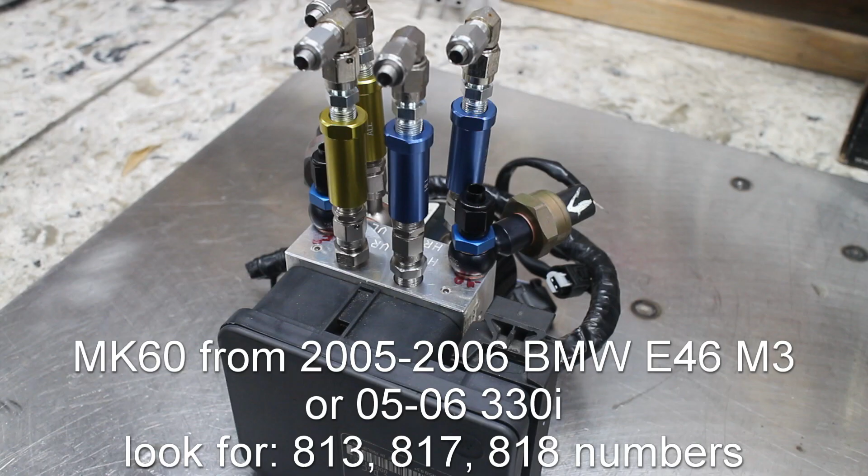I can't tell you how much I'm enjoying this ABS on my Camaro. There's zero hassle when braking and turning, and my favorite part? No flat spotting tires. These 315 Yokohama A052s have at least 3 flat spots on every tire. And every flat spot is where the tires end up cording. And it hurts to flat spot a tire this expensive. But now, that's a thing of the past.

Okay, so what is this ABS? Well, it's a Mark 60. It is the ABS unit out of a 2005 or 2006 BMW E46, my unit being the M3 unit. So why this ABS? Well, it's unique because it's completely standalone. It works with pretty much anything that has 4 wheels, and it just so happens to be an extremely good unit. The Mark 60 E1 uses internal pressure sensors and normal tone wheels.

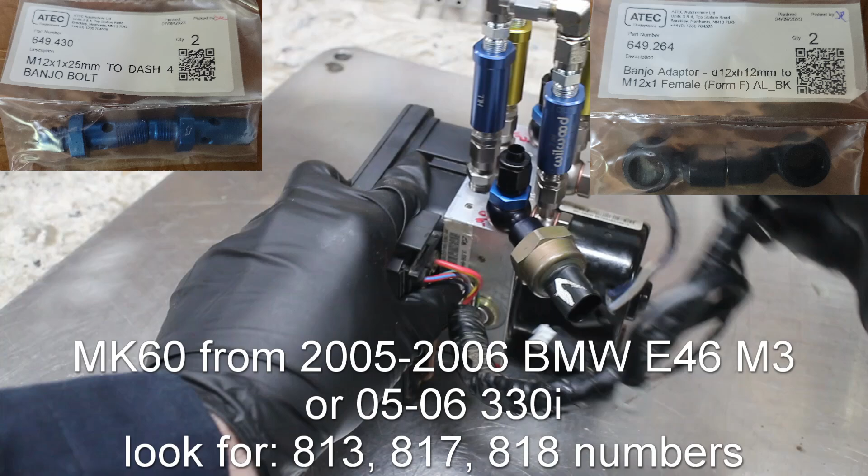The Mark 60 E5, found on E90 and E92 BMWs, uses internal pressure sensors and the newer magnetic reluctor wheels. Obviously, these use different speed sensors. So the original Mark 60 uses tone wheels and 2 external pressure sensors. There are 3 different units that you're looking for. There's an 813, 817, and an 818.

The 813 unit can be flashed with the BMW Motorsport tune. The 817 already has that race tune in it, but these units are extremely rare. The 818 is the most common, but it can't be flashed. I have the 818 unit. And just a warning, this video is extremely long. For all the racers out there, the information in here is going to be very valuable.

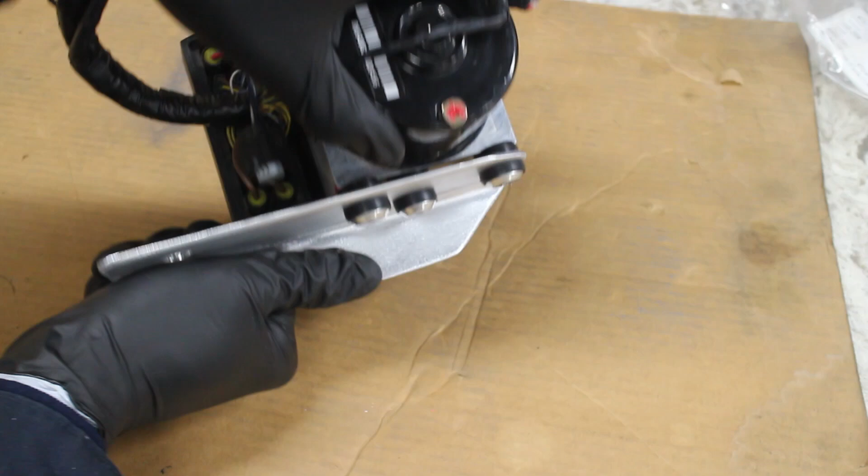Okay, so let's start this expensive boondoggle. You need to find a place to mount the unit. This is rather hard since it's not easy to find a spot to put this unit. I ended up mounting my ABS unit on rubber bumpers and to an aluminum bar, then mounted it to my cut-up crash bar. The driver front is not an ideal location for this, but I could not find any other spots.

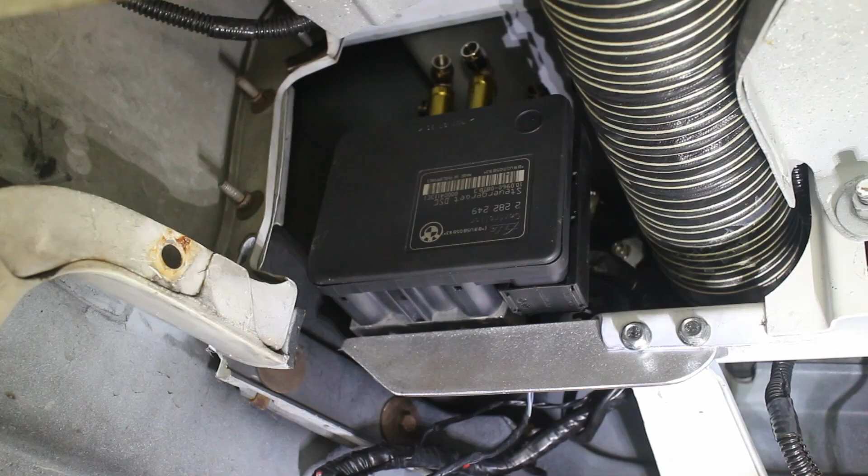If you notice, the rubber mounts allow the ABS unit to move around a little bit; this keeps vibrations from damaging the unit. Now to the wiring, the brutal part. A lot of wires, a lot of crimps. I made this wiring myself from scratch. You can buy full wiring kits for maybe less than $2,000.

This is the basic ABS wiring on a 2005 through 2006 Mark 60 ABS from an E46 M3. The red lines are terminals that you can ignore. I used a plug kit from Thule Wire Works. You can also use the factory ABS plug pin if you want to go that way. I just wanted something a little bit cleaner.

So I'll start with the 2 12-volt power wires. They use the larger crimps. I used 2 12-gauge wires for this, as they need to be able to hold 20 amps each. These crimp terminals actually work with a mixture of WeatherPack and MetriPack crimps, so I didn't have to buy any new crimps, even though these are European spec items.

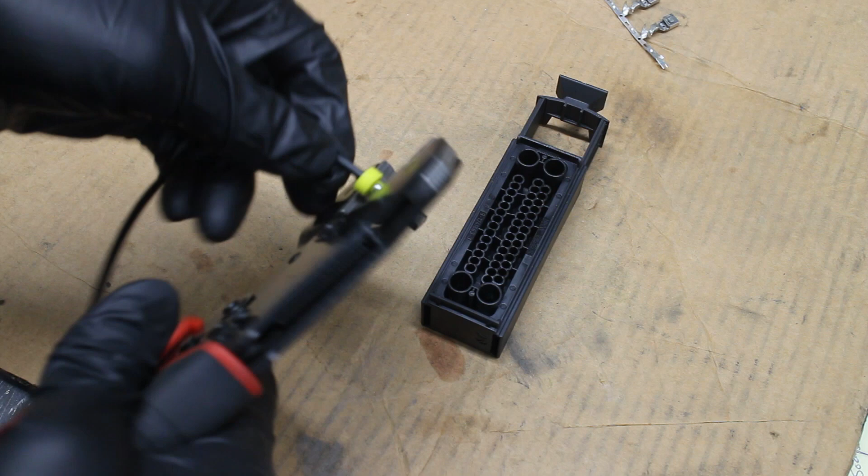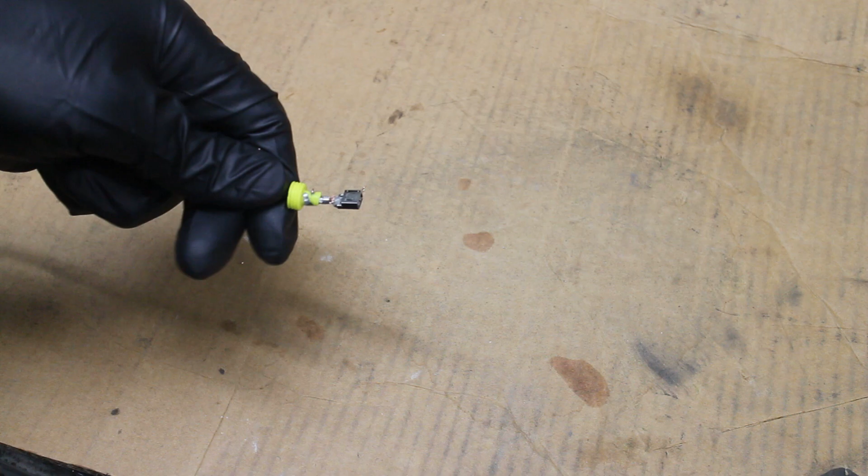The wiring chart says that the 2 12-volt power wires are pin 1 and 32. The plastic Mark 60 plug has pinhole numbers cast into it that line up with pin 1 and obviously 32. With the 2 power wires done, I then made the 2 12-gauge ground wires. Notice here, the number is cast into the plug, and that will tell you where everything goes.

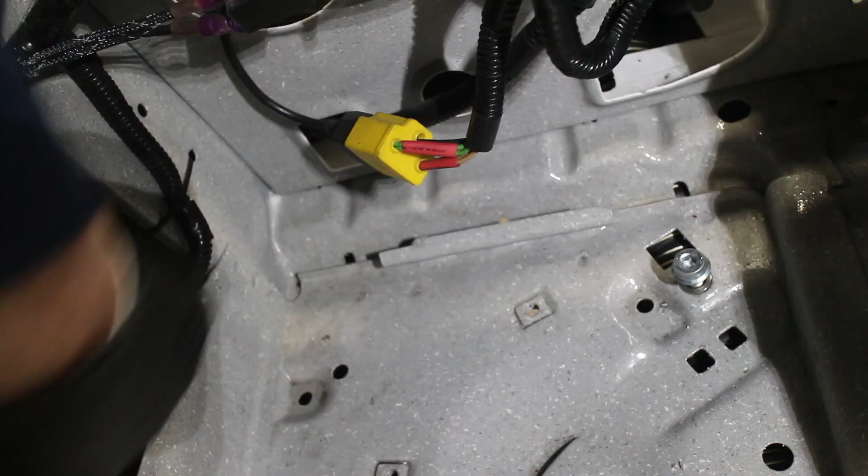And if you've ever watched any of my other wiring videos, I love to label everything, and this video is no exception. A label, some sleeving, and clear heat shrink goes on every single wire. In my case, the ground wires are very short. I mounted the 2 grounds to the crash bar since that is a chassis ground source. The 2 12-gauge power wires will go where the old C100 wires were alongside my driver inner fender.

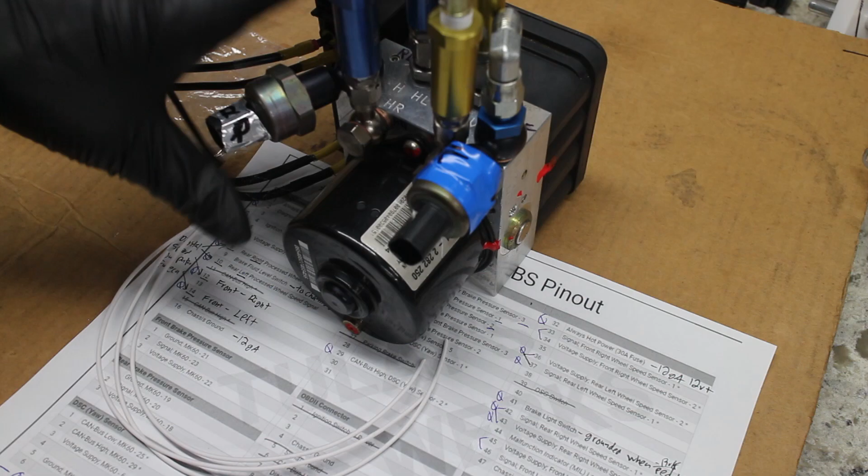So after removing the unit, I'll crimp the 2 pressure sensor wires. Terminals 18 through 20 are for the rear pressure sensor, and 21 through 23 are for the front pressure sensor. Notice the small numbers next to 18, 19, and 20. These 1, 2, and 3 terminals correspond to the sensor plug. The 1, 2, and 3 are also cast into the plastic plug so you know which one is which.

I'll count the holes, and the pressure sensor pins are right here. The rest of these pins use these tiny terminals. Normally you'd use a 20 or 22 gauge wire here. However, I had 1,000 feet of very, very expensive Waytek 18 gauge, so that's what I used.

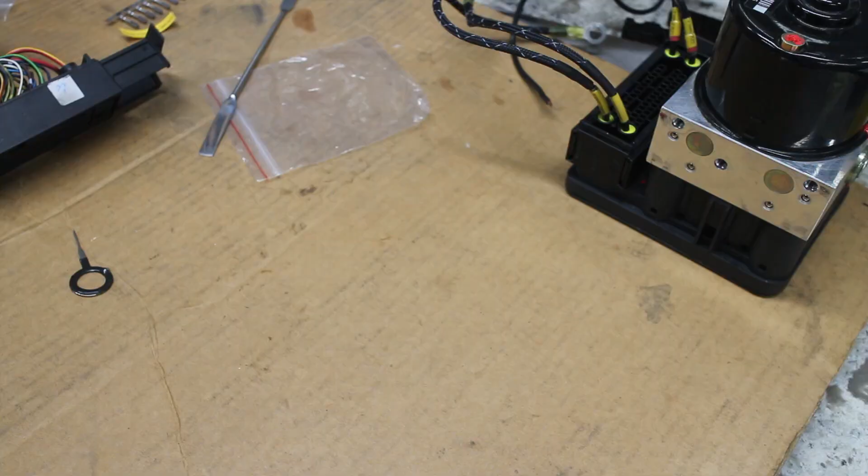The small terminals use these tiny green weather seals. I used an H6 weather pack crimp die, and that seemed to work on these European connectors. I sleeved the 3 wires loosely and did a quick length fit check. Seems to work, although I could have made them a little bit longer. The sensor plugs use a different terminal that is provided in the wiring plug kit.

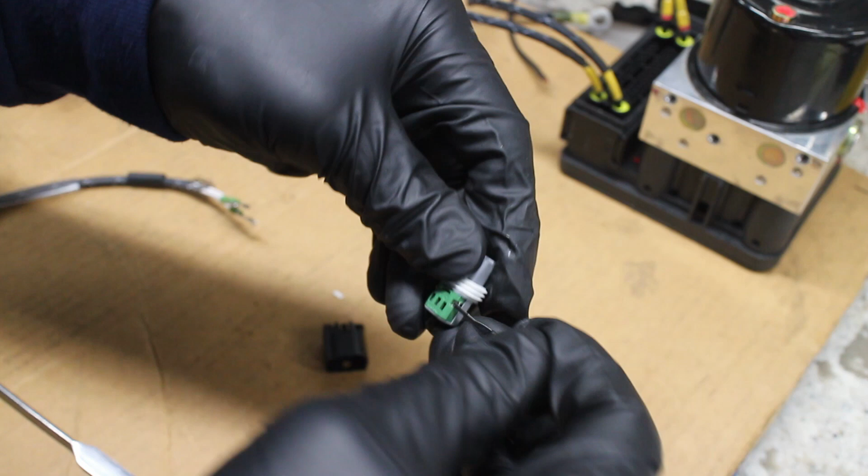And remember, the main wiring diagram shows the 1, 2, and 3 pin. These correspond to the marks on the plug. Make sure the pins are seated and locked in, then install the green plastic clip. The outer shell then slips on from behind.

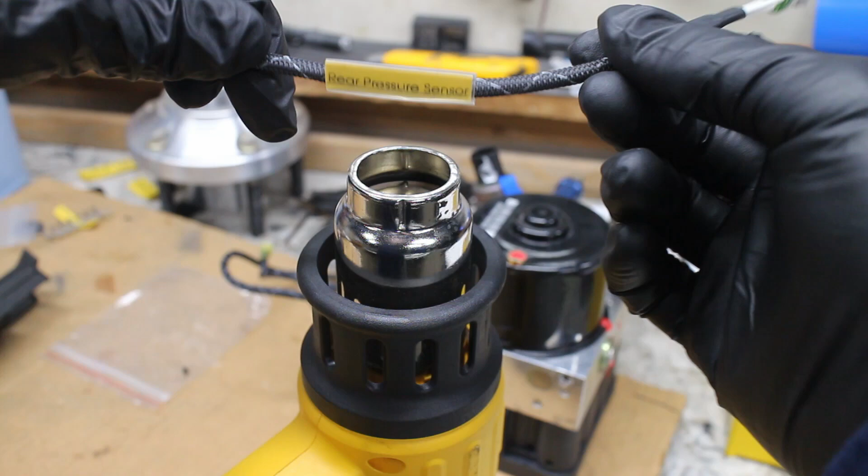Dual wall heat shrink keeps the sleeving in place, and of course all my wires are labeled. And since I'm a paranoid guy, I resistance tested every single crimp that I did on this wiring just to make sure everything was crimped correctly.

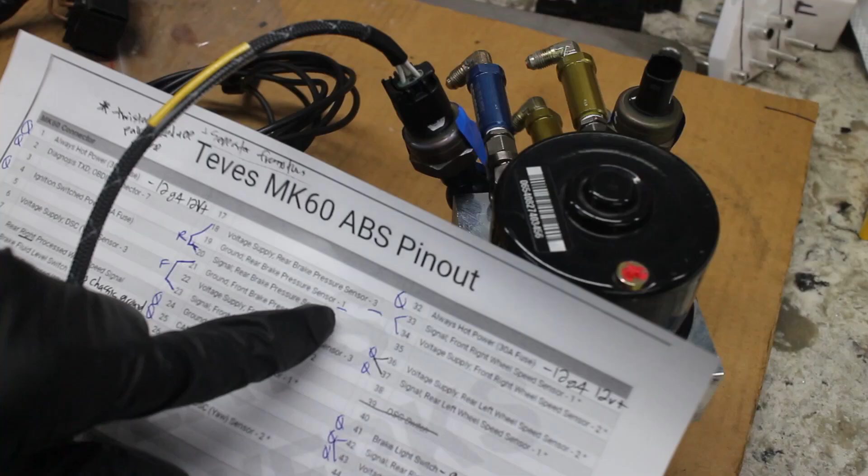The sensor plug is pushed in. I then labeled each of the 3 wires with a colored mark to tell them apart, since all my wires are white. Make sure to reference the wire chart and make sure to check where each of the 3 sensor wires go. Some pinholes are unused. These blue plug seals seal them off. I then plugged in the wires into the main plug. Repeat this process on the other pressure sensor.

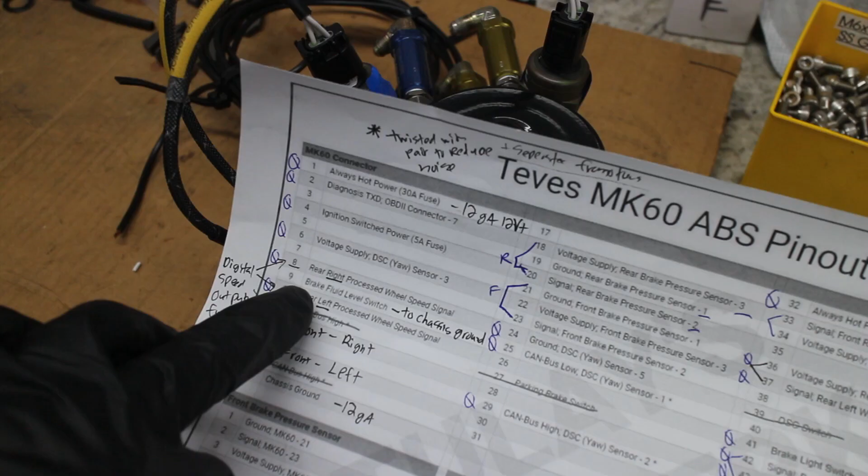Just to review, each of the 18, 19, and 20 pins corresponds with a pin on the main plug. Each pin has an asterisk that corresponds with a smaller plug. Alright, so now to pin number 9. This is for the fluid level switch. This sees ground when the sensor senses that the brake fluid reservoir is full. I don't have a fluid level sensor, so I just sent this pin to a chassis ground so the ABS unit will always think that the level is good. If you have something like a 4th gen master cylinder, you can wire up the low fluid switch to that.

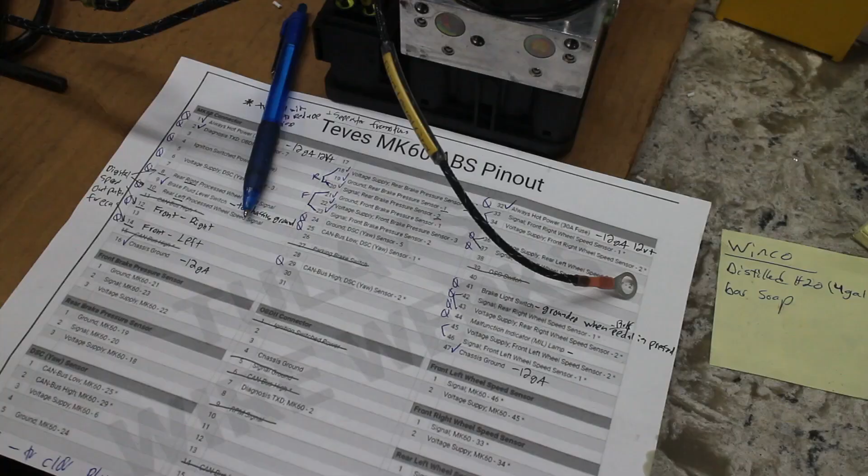Pin 2 is the number 7 OBD2 port pin wire. I already had my wire lengths set up, so I went ahead and plugged it in. Now for the yaw sensor. This tells the ABS if you're pulling G-forces, and it also needs 4 wires. Pin 25, 29, 6, and 24. Looking at pin number 6, there's a 3 after the asterisk. That means that pin 3 on the yaw sensor plug corresponds with pin 6 on the ABS unit.

I have a bad habit of wiring from the destination first. I really need to stop doing that. The other various wires get plugged in, such as the speed sensor outputs. I won't cover everything in this video, otherwise the video would be 2 hours long.

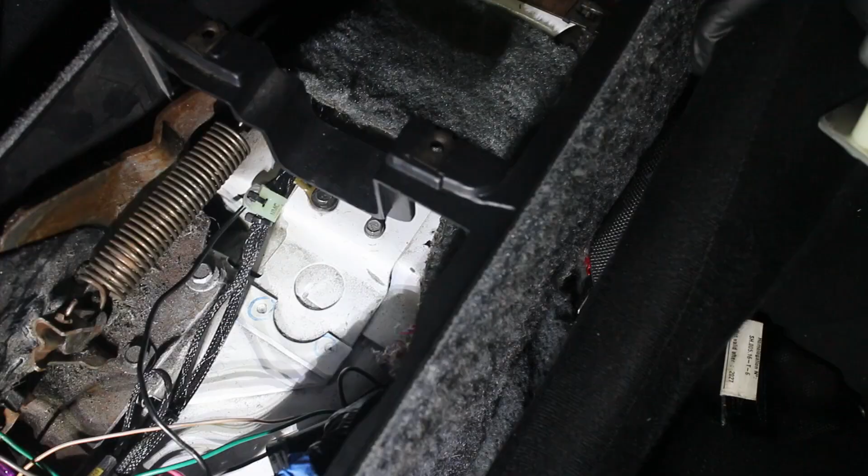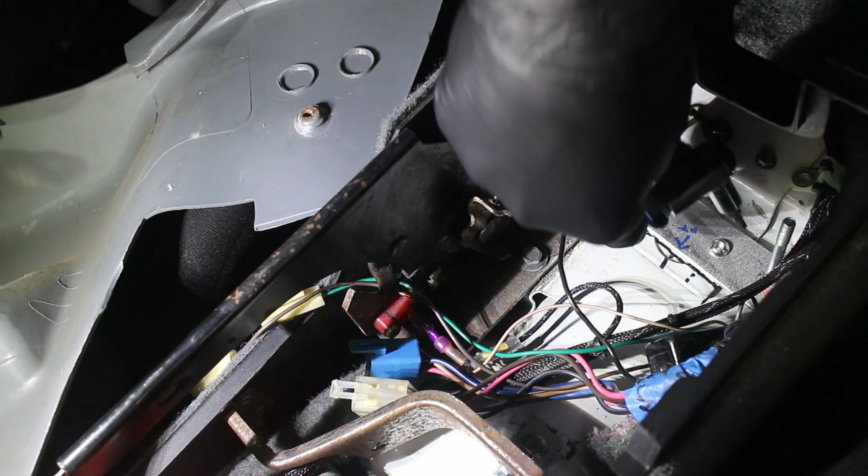So the yaw sensor needs a home, ideally close to the center line of the car, in my case, under the center console. I drilled 2 holes and installed rivnuts with RTV on them to avoid leaks. I then used this aluminum plate and a few bolts and spacers to mount the yaw sensor.

The sensor is mounted in this orientation. It looks upside down, but it's not. The tab faces up and the plug faces towards the front of the car. I made up the wires for the rest of this in various lengths.

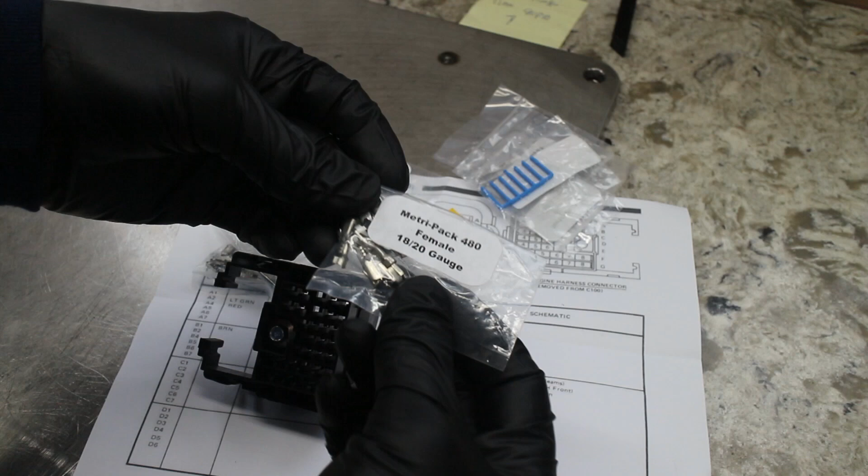My 92 Camaro has a firewall plug called the C100. It's not used on my car because I have an LS1 swap with a standalone harness. So this is the perfect place to route the wires. I bought a new C100 plug kit off eBay, then printed up a blank C100 plug diagram. The main plug is unique in this way because it installs with a slider.

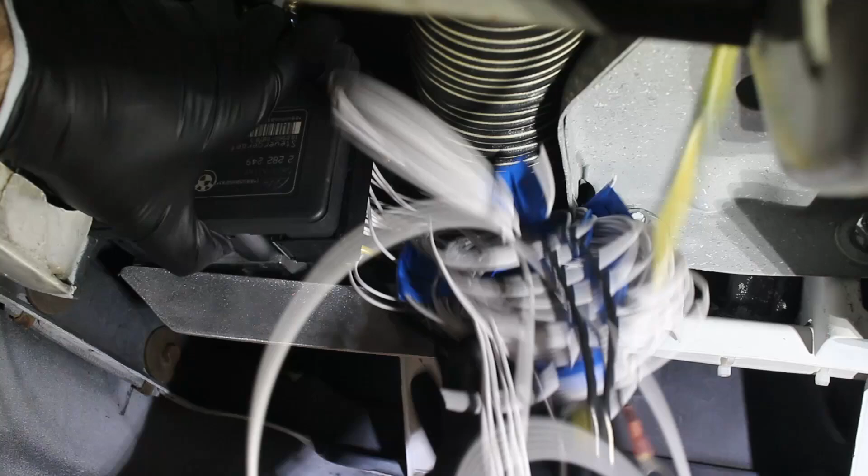These are my headlight wires. I installed big P-clamps to hold up all these wires. The unit is then bolted up. Do you remember when I said I needed to start wiring from the destination first? Well, too late now. Anyways. The wires are run through the P-clamps, then cut to length.

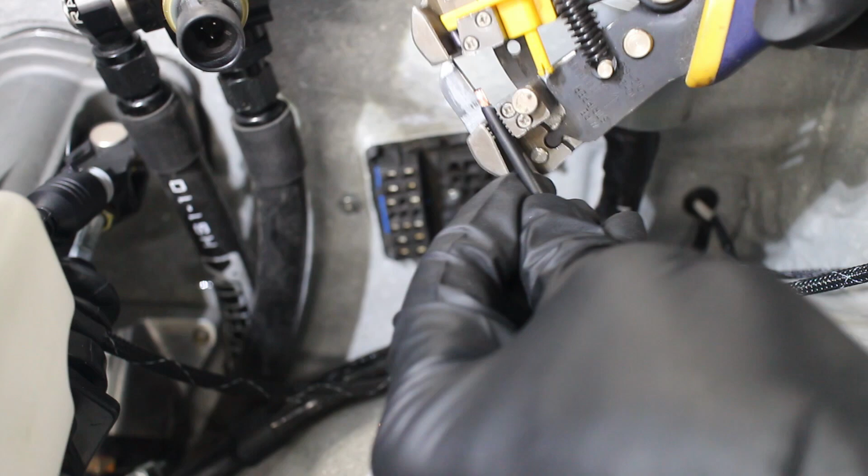Some sleeving, heat shrink, and new terminal completes the steps. And of course, a label for everything. Pin 1 and 32 are the two 12-gauge wires that are the 12-volt positive source. The C100 has several big wires from the factory, so that works with this perfectly.

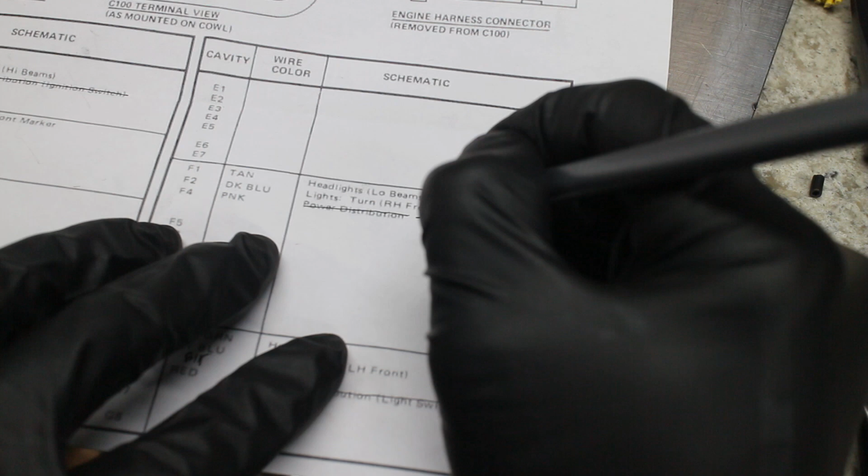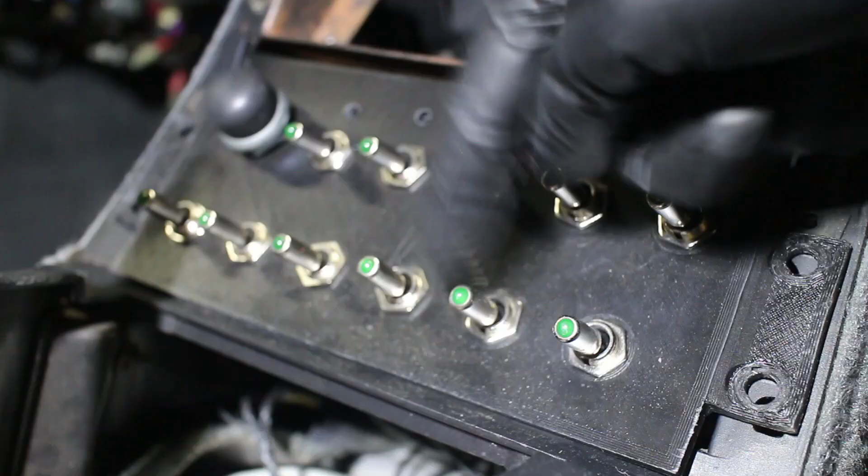I then wrote down what wire went where on this bulkhead. Yeah, I rewired my car from scratch and it got a little messy. It was my first time, but here's the disaster. Thankfully, it all works. Anyways, I already had two spare 30 amp relays already wired up to a switch. So I attached the two 12-gauge power wires to the M3 plugs and sent it to the C100 plug. And of course, wrote down every wire and where it went.

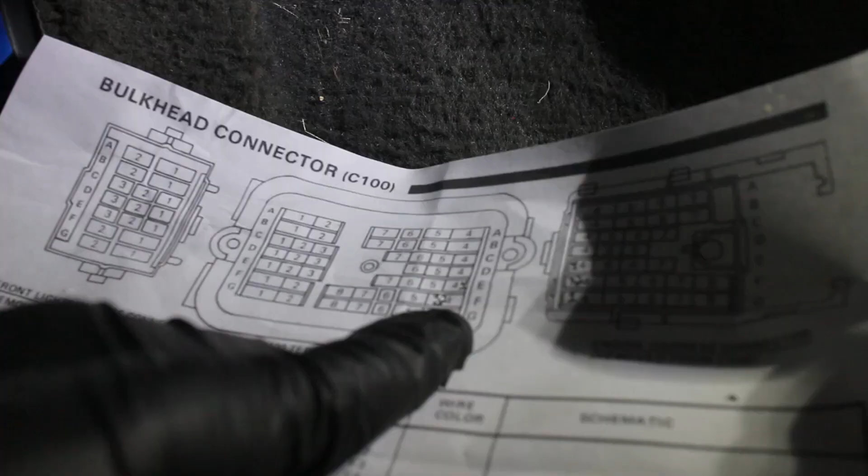So next is a 12 volt 5 amp wire for the ABS activation. This is typically powered on when the car is running. If you want to turn the ABS unit on and off, if you put a toggle switch on this wire, that'll get you what you want. But in my case, my car is powered off of a single switch. I simply attach this wire to a 12 volt source.

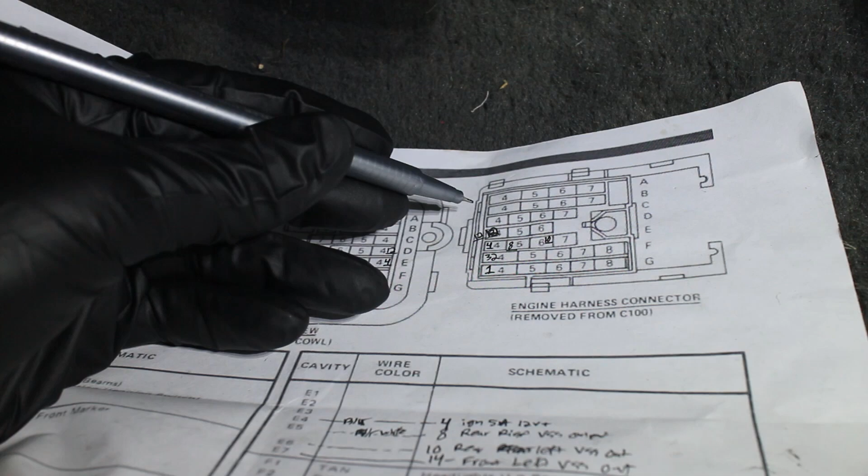Pin 8, 10, 12, and 14 are processed speed outputs, meaning in the future, I can attach an ECU that uses traction control or the like, and I can use the ABS wheel speed sensors as the data. I attach these wires to a Deutsch plug for future projects. Hint, hint. I then pinned it into the C100 on the front and back.

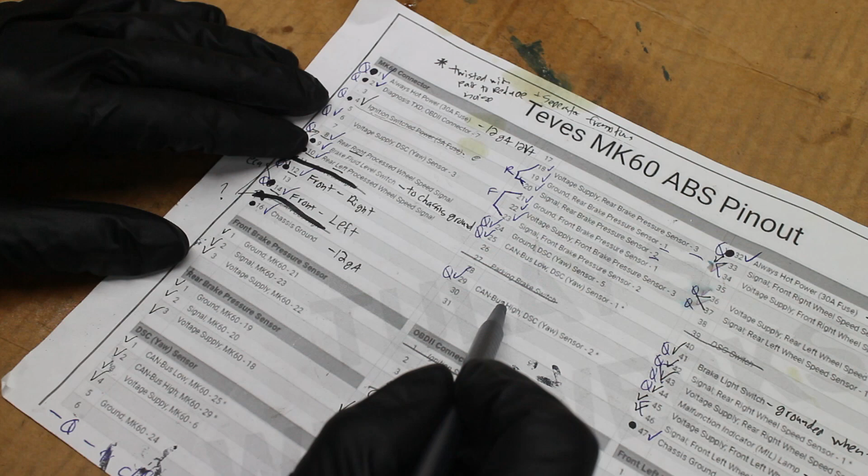I purchased an OBD2 pin kit for like $10. The MK60 pin 2 goes to the pin 7 on the OBD2 port. So now on to the yaw sensor wiring. Pin 25, 29, 6, and 24 correspond with pins 1 through 4 on the yaw plug. The yaw plug is assembled and disassembled just like the pressure sensor plugs on the ABS unit.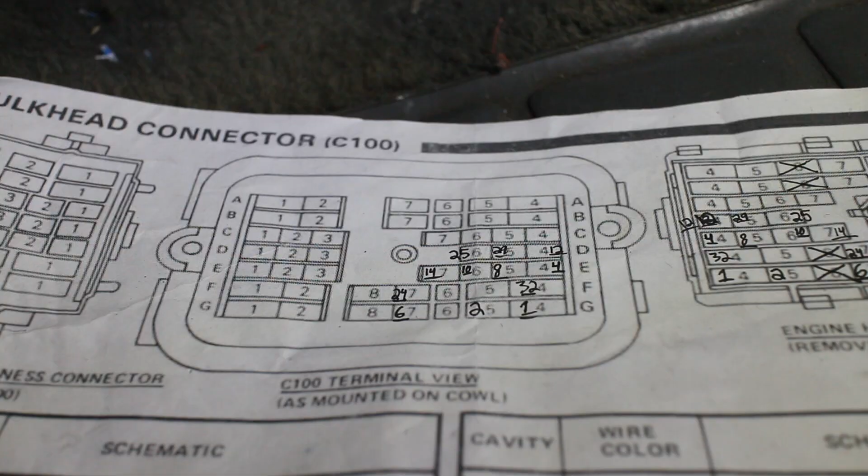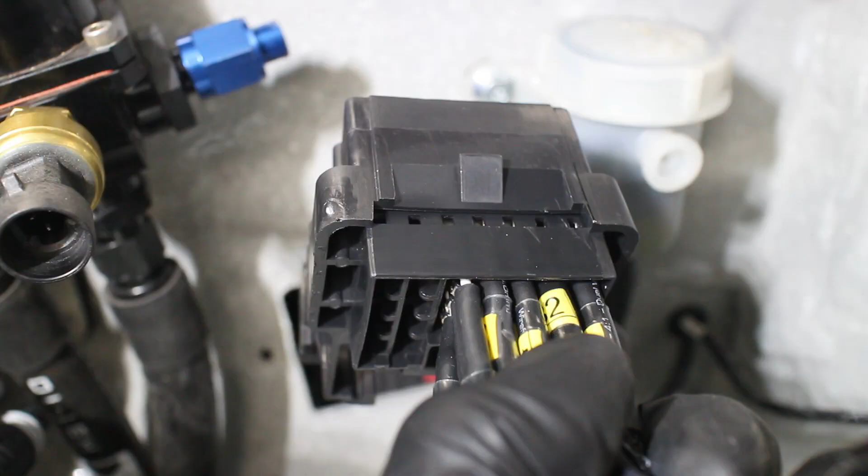The yaw sensor wires are then installed on my firewall plug. The majority of the C100 bulkhead uses a common MetriPack 280. And again, label and record where everything goes. The yaw sensor is plugged in and the C100 pins installed. The rest of the rear speed sensors and brake pedal wires are plugged into the C100. This plastic retaining clip keeps all the pins in.

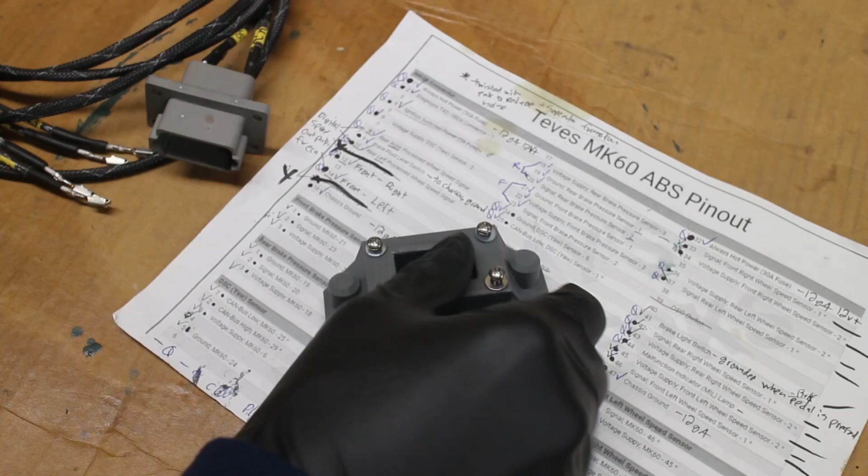So now for the rear speed sensors. I need a way to route them out of the car and to the axles. So I 3D printed a bulkhead for a Deutsch 12-pin flanged plug. I cut a hole in the rear for the bulkhead and then installed it just like my fuel pump bulkhead,

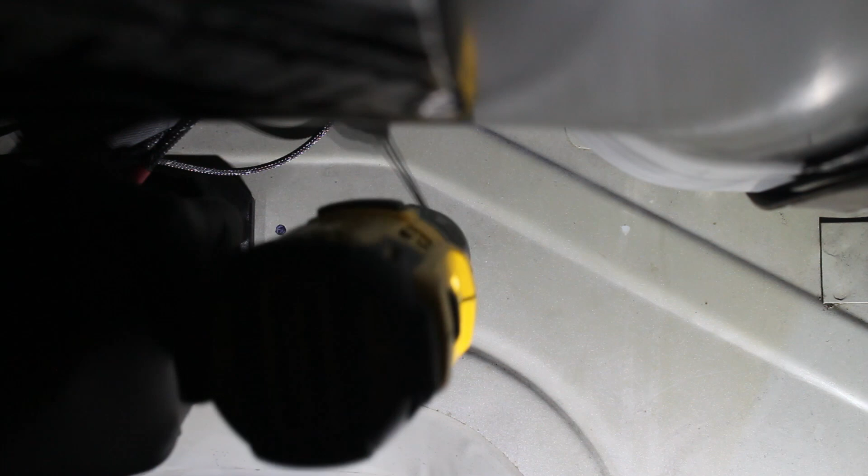It's a pretty easy install overall. The wires are fed through and the flange plug is screwed in.

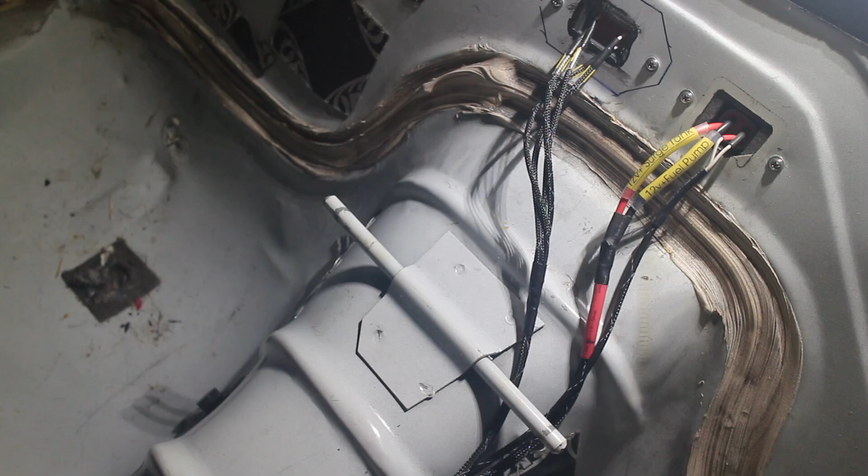I peeled back the carpet and ran the 4 rear speed sensor wires underneath of it. I routed the wires through the center console and all the way to the C100 plug.

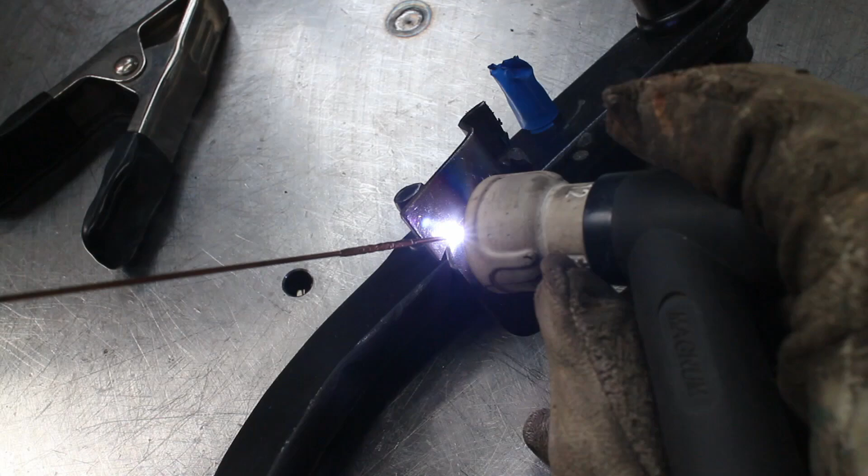So I ground this part off of the brake pedal switch pad a little while back. And surprise, surprise, I need to put the metal back. A few welds and a grinder, and it's all good again. This is for the ABS brake pedal switch. Pin 41 should be grounded when the brake pedal is pressed, and it should be an open circuit when the brake pedal is not pressed.

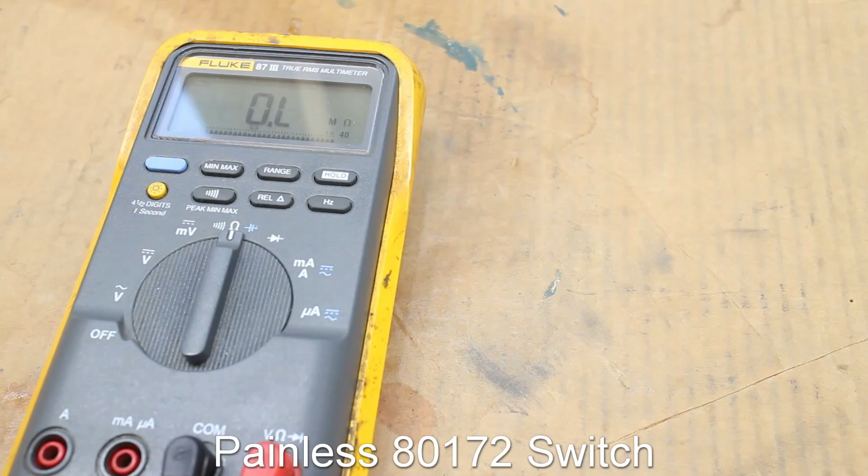I ended up using this Painless brake switch. When the switch is pressed, it's an open circuit. When the switch is unpressed, the circuit is connected. So I had a spot open where my cruise control switch used to be, so the Painless switch then takes its place. The OEM switch uses these weird clips, but this switch uses a nut instead.

To make this work, one pin on the switch is connected to a chassis ground. In my case, this rather crowded ground screw.

So pin 41 is grounded when the brake pedal is pressed. Now onto pin 44, the warning light for any ABS issues.

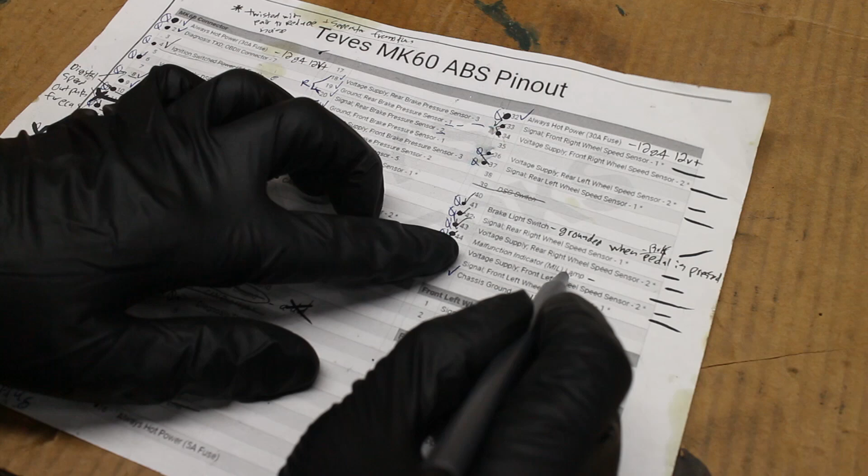I ordered this PCB from a guy online named Alex. This board simplified the ABS warning light since the Germans wired it up like weirdos. So it has 5 pins to solder: the ABS pin, which is pin 44, a chassis ground, 12-volt switched power, LED 12-volt power, and the LED ground.

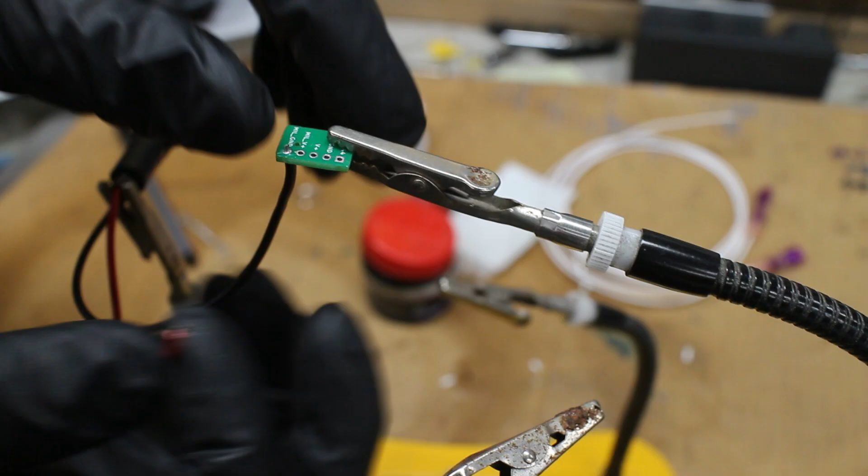I started by soldering this ABS LED that I got off Amazon. Some solder flux and the wires solder up very easily. Then the next 3 wires are soldered in. The 18 gauge wire that I'm using is a little bit too big, so I had to thin it down a bit to fit the PCB. Not a big deal.

This is the ABS LED part number. The light uses a 1/2 inch hole and it's a pretty good solution for this. The C100 plug is pinned up and bolted back in. The main ABS plug has this plastic pin as well.

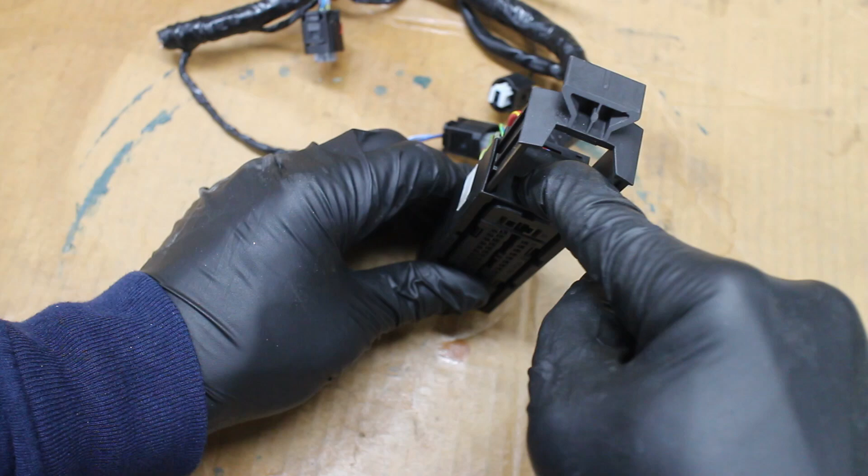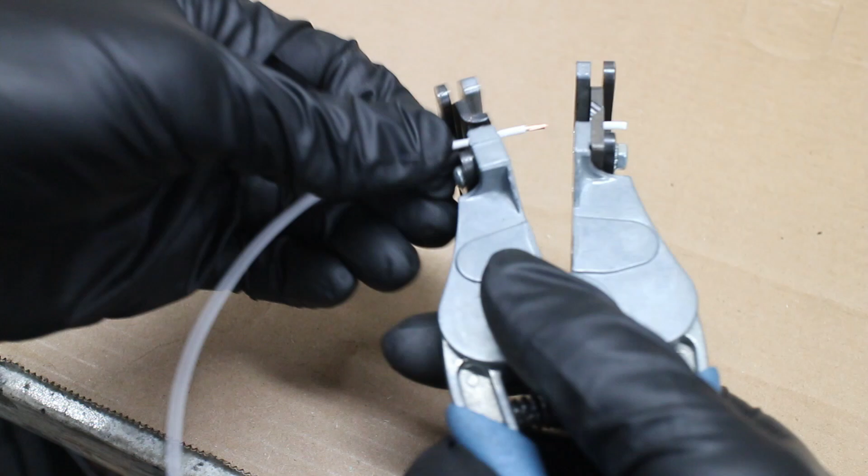And now for the speed sensor plugs. They're crimped the same way as the other sensors. Push the plugs in. The plugs have numbers 1 and 2 molded into the plastic. These correspond with the ABS pins on the wire chart. Then this plastic piece clips on. The rear wires attach to my 12-pin flange plug in the rear of the car.

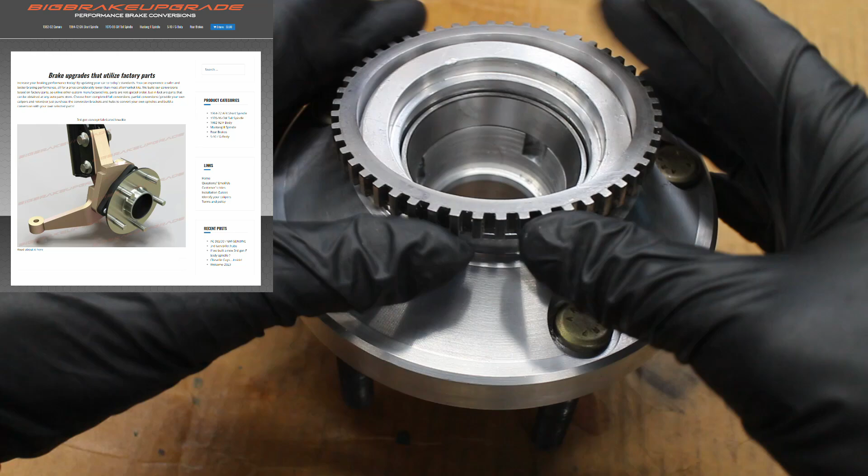Now for the big items, the ABS tone wheels. My 92 Camaro never had any, so I'm going to have to install 4 of them, and that's where the difficult part comes in. I used tone wheels from a 2014 Mustang, then had them machined to fit. These are 50-tooth tone wheels. The ABS unit doesn't really care about the tooth count as long as all 4 of the tone rings have the same tooth count. My billet hubs were machined to accept this ABS tone wheel.

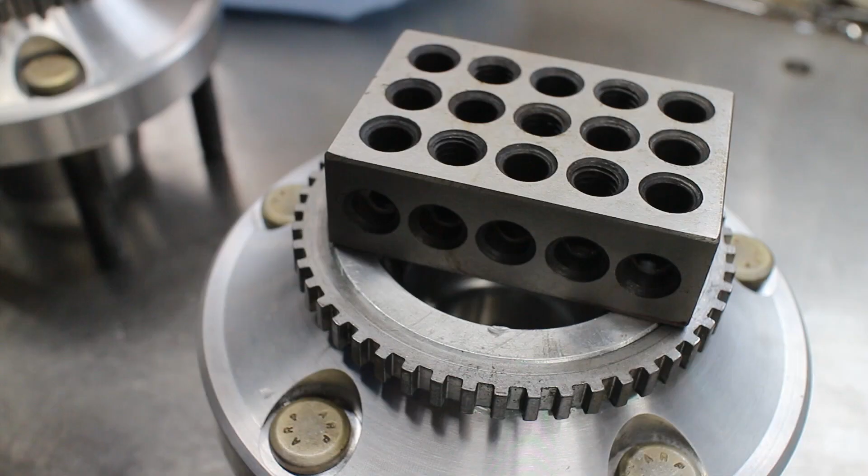Thanks to Scott at BigBrakeUpgrade.com for doing this for me, for a mild fee. I used about a 3/1000th of an inch press fit. I froze my hubs in my freezer and then cooked my ABS rings in an oven. Green Loctite is applied and the ring is hammered on, nice and flat.

My 3rd gen axles have no area for an ABS tone ring, so I ordered a custom set of 98 through 2002 Camaro axles from Moser, then had Moser cut them down to the shorter 3rd gen length. I had the Mustang tone wheels machined to accept a 0.002 of an inch interference fit. I don't have any shots of this, but a local axle shop pressed the rings on for me since I don't have any way to do it myself.

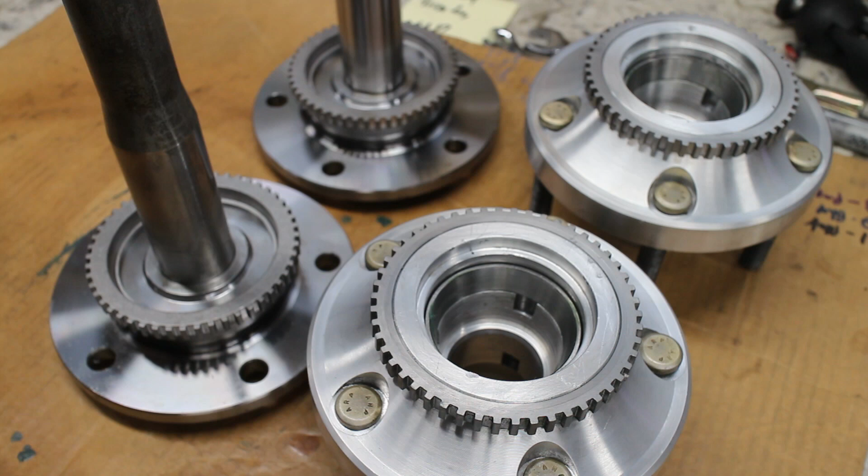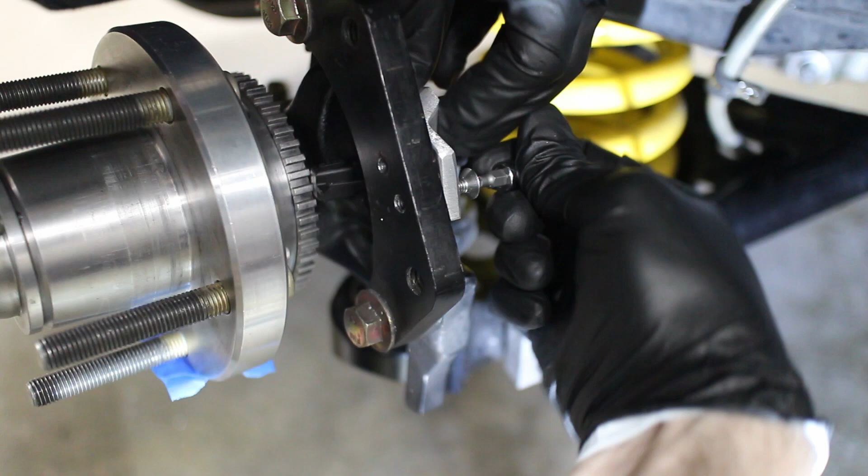Now the speed sensors. I used the rear Bosch E46 speed sensors on all 4 corners. Which speed sensor you choose is going to depend on what car and how much room you have. I ended up using this wacky aluminum mount attached to my brake caliper backing plate to mount the speed sensor. There are more than just E46 speed sensors that work with this MK60 ABS unit, but I'm not going to cover all that. That information is available online.

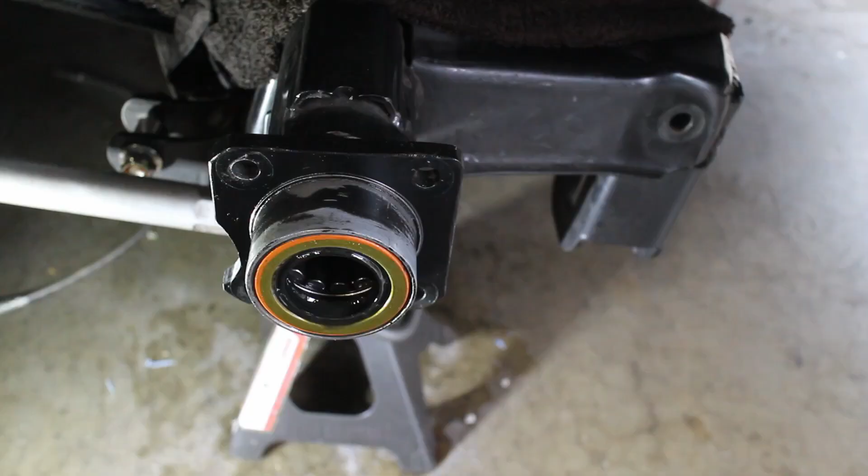I set the speed sensor gap to about 20 thousandths. That's about 0.5 millimeter. Less gap is generally better. What I ended up doing was drilling holes in my backing plates and then shoved the sensor in. This barely clears the drum parking brake shoes, but it did work. Also used the same 20 thousandths gap. It's pretty close, but it works.

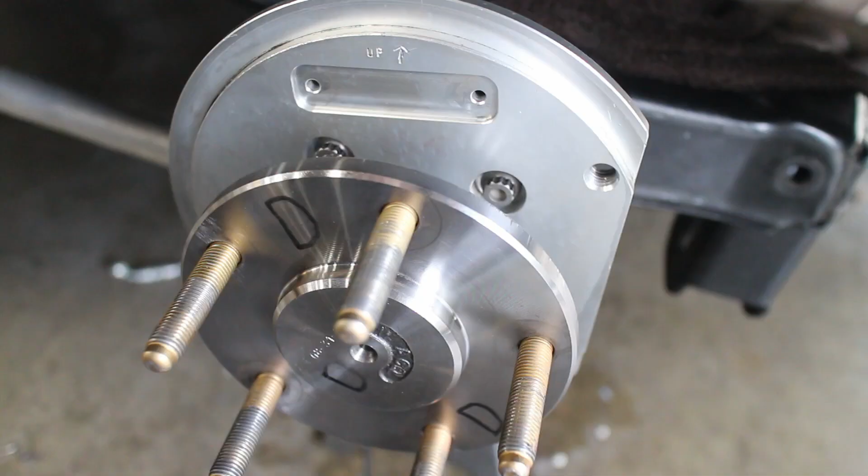I bolted up the backing plates with some used aerospace grade bolts. The new axle is slipped in. A 20 thousandths inch gap is used, just like the front. The parking brake shoes are installed alongside the rotor.

I took a carbide bit in a small router to clearance the axle flange face. This works stupid well to my surprise. Very, very nice finish. A quick shot of paint and that's it.

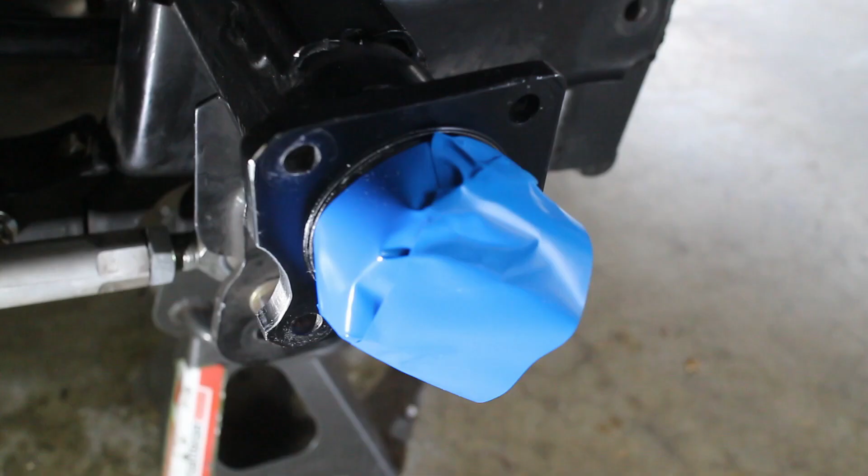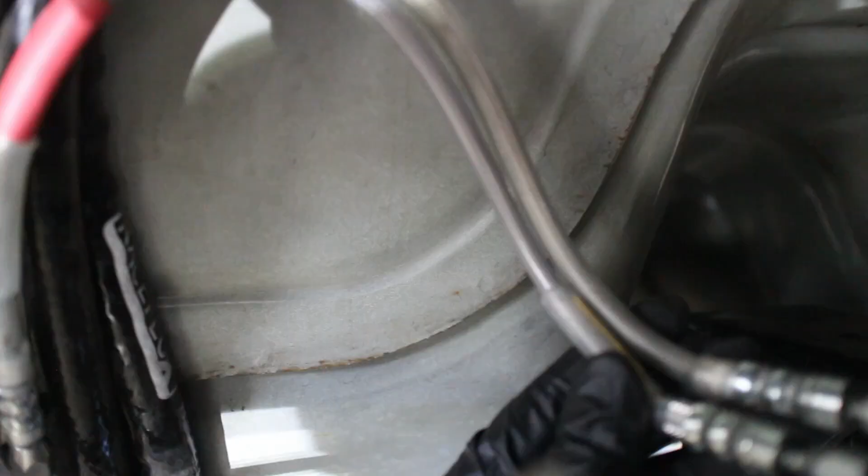So now for the rear brake lines. My single T-fitting is removed, so I can use these 2 Earl's fittings. This ABS is a 4-channel, so it requires 2 rear brake lines. This is how I added another brake line. I shoved another 3/16 stainless hard line under my custom fuel lines, wrapped in heat sleeving of course. I like AN line flares, so you'll see a lot of these on my car.

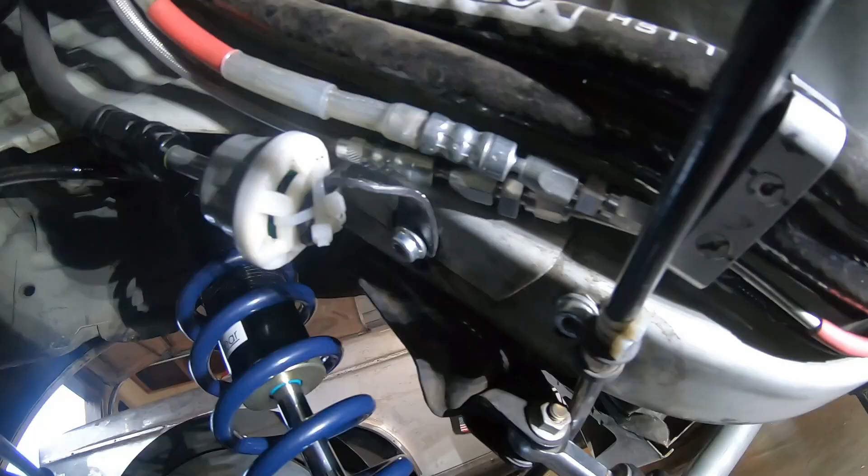I had a local hydraulic shop make me some 3AN PTFE soft lines for the rear brakes. You can also custom order PTFE lines from Pegasus Racing as well.

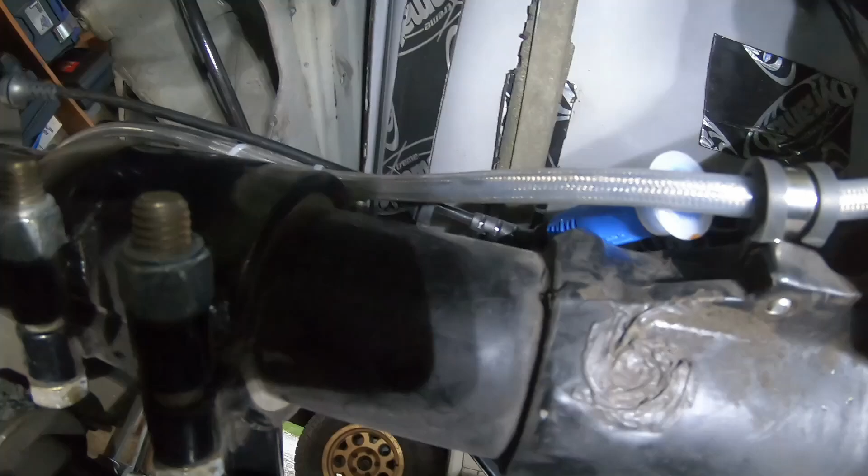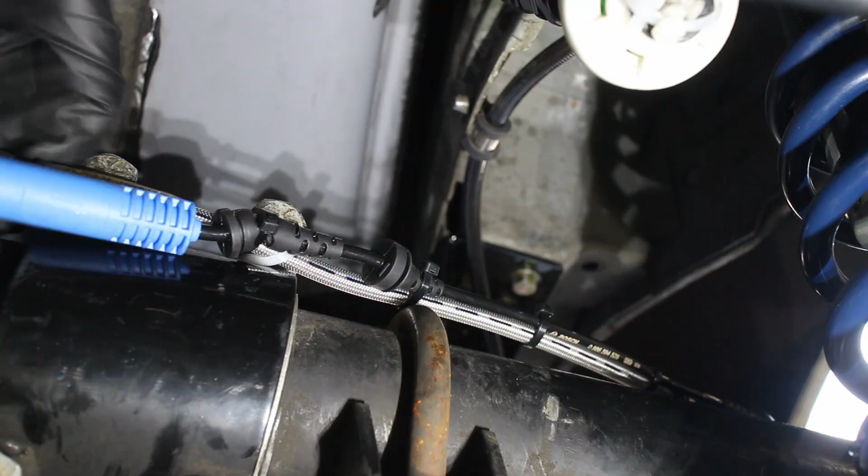My bulkhead gets plugged in. The rear speed sensor wires are plugged in and secured with zip ties. The front speed sensor plugs are plugged in.

So I'm a weirdo, so I resistance tested every single wire that I made and crimped on this entire wiring harness. This was to make sure I had good connections and didn't mix up any wires. Pretty important that you don't mix up wires on this. As it turns out, I didn't make a single mistake.

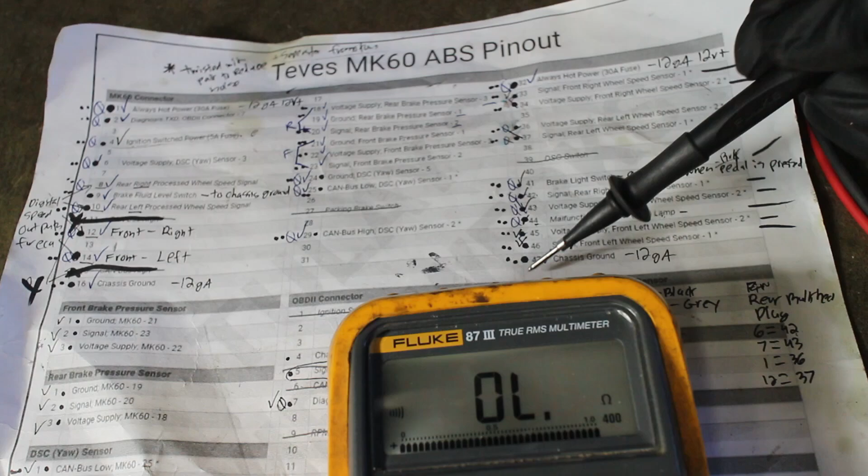So since this unit is in German, I'll tell you which port is what. The front port that goes to the master cylinders is labeled V. The rear port for the master cylinders is labeled H. I went with two 4AN PTFE feed lines. These go from the master cylinders to the ABS unit. Since the OEM unit uses a 6mm line front and rear, I figured it was a good match to use the larger AN size. 4AN is extremely close to 6mm brake lines.

So how much does it matter? Well, I'm not really sure, but I haven't damaged my balance bar and other people have, so maybe that's the difference. So that's two 4AN PTFE feed lines and four 3AN PTFE outlines that go to each corner of the car. This mess of an ABS unit is installed with my new PTFE lines. I can tell that this is going to be a pain to fix later on, but whatever.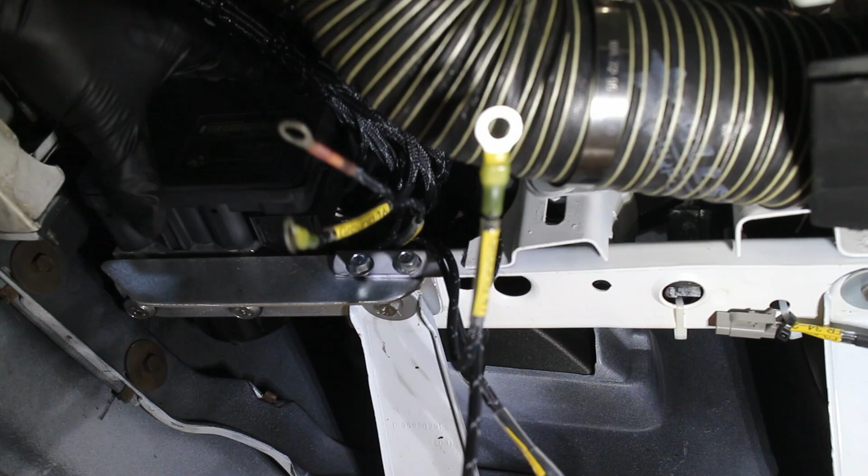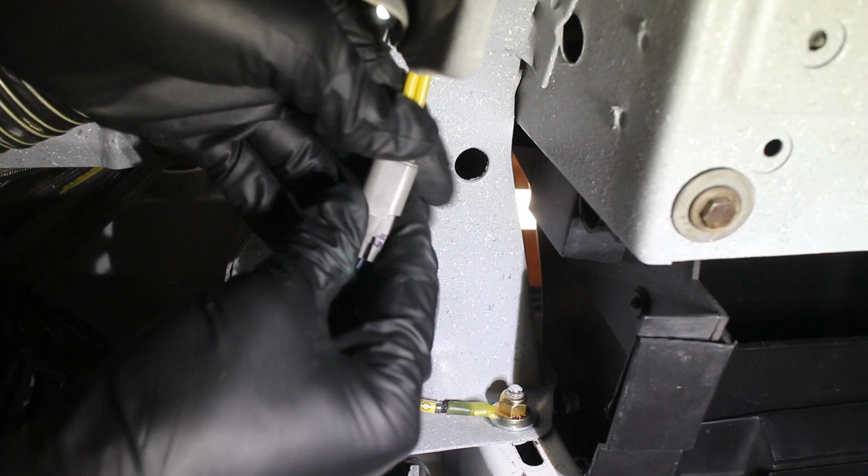The grounds are then bolted up. If you noticed, I used a pair of small Deutsch plugs on the front speed sensors to aid in disassembly in the future. The grounds are good ohm-wise. My front brake ducts are reconnected.

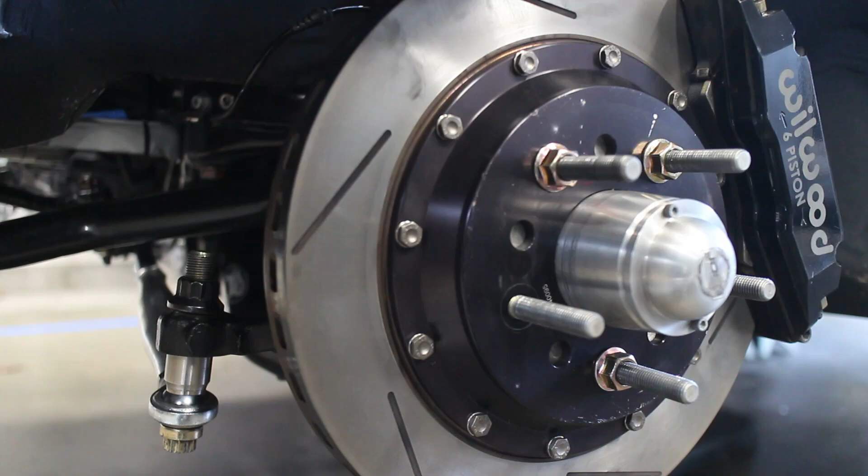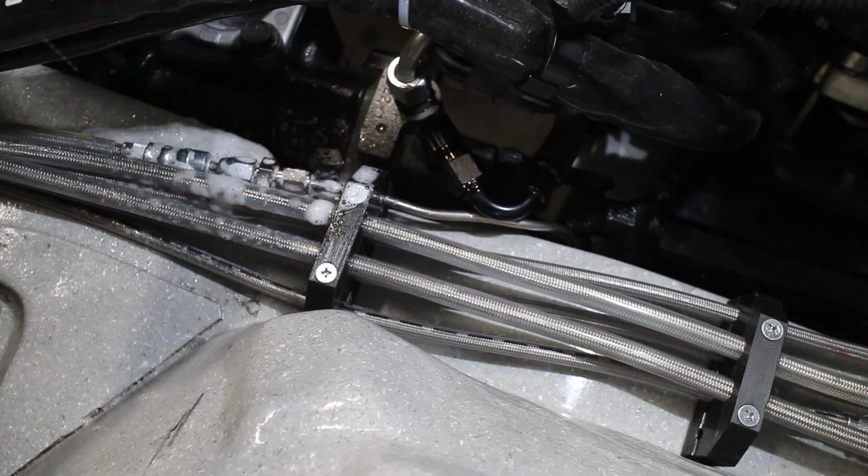I powered up my car and checked the sensors with a Foxwell NT510 Elite scanner. Spin the hubs by hand, and now I see speed outputs. Press the brake pedal, and I can hear the ABS unit ticking, so this is working. I pressure tested all my brake lines for leaks. Even shop air at 125 psi is a good way to check for leaks, as air has a smaller molecule size than brake fluid, so it's more likely to leak through small gaps. I did have one leak that needed one of these seal savers.

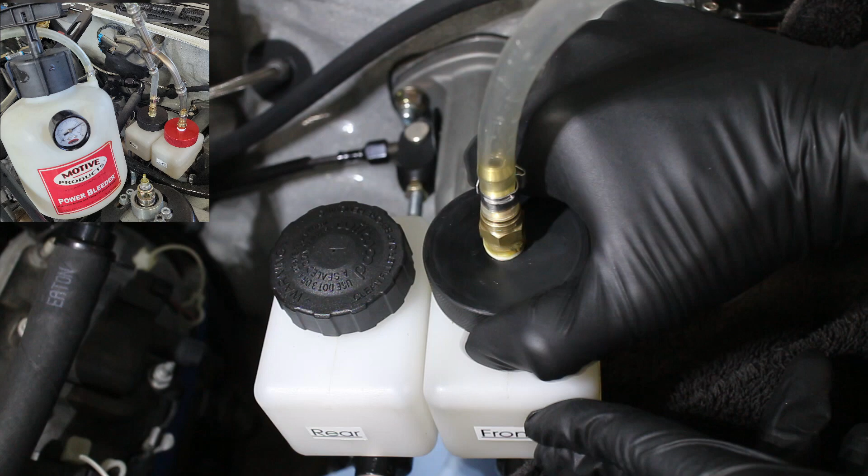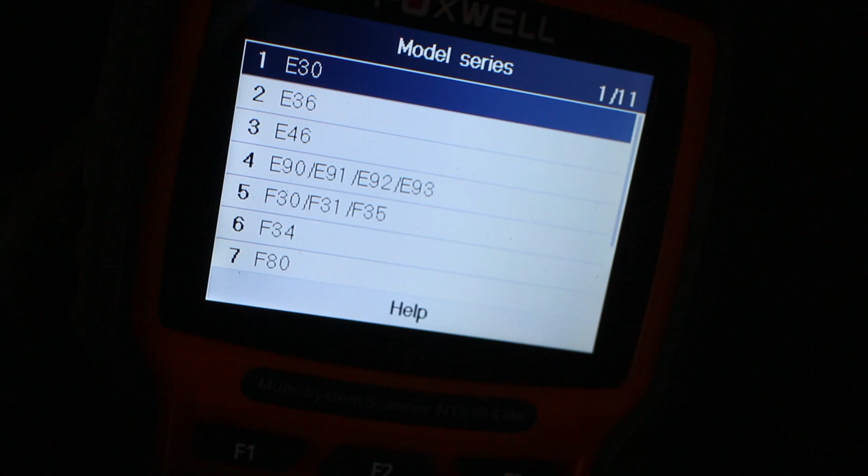Now to bleed the brakes. A Motive power bleeder is used here. I made a dual bleeder cap later on to bleed the front and rear brakes at the same time for this balance bar setup. Now to use this Foxwell China Boy scanner. Select BMW, manual selection, 3 series, E46, M3 Coupe, USA left-hand drive. In my case, 2005. Then hit yes.

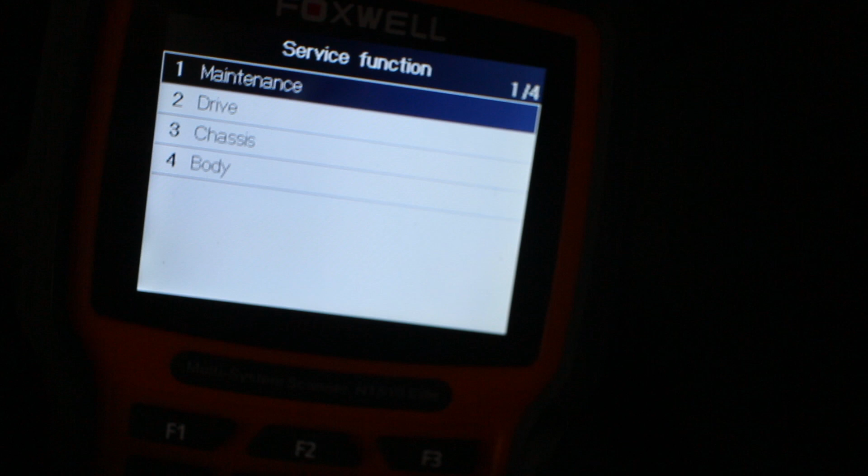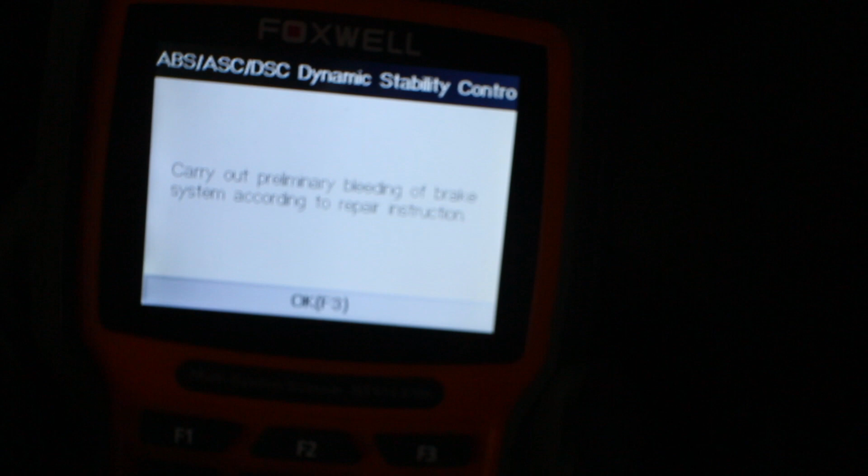Service. Chassis. Then ABS/dynamic stability control. I guess ventilation means bleeding if you translate German to Chinese, then to English again. Next up is to just follow the prompts. Each corner is done individually with the power bleeder attached. Some people have noted that they killed their Wilwood master cylinders with this bleeding procedure. I'm not sure how that happened to them, but just be careful.

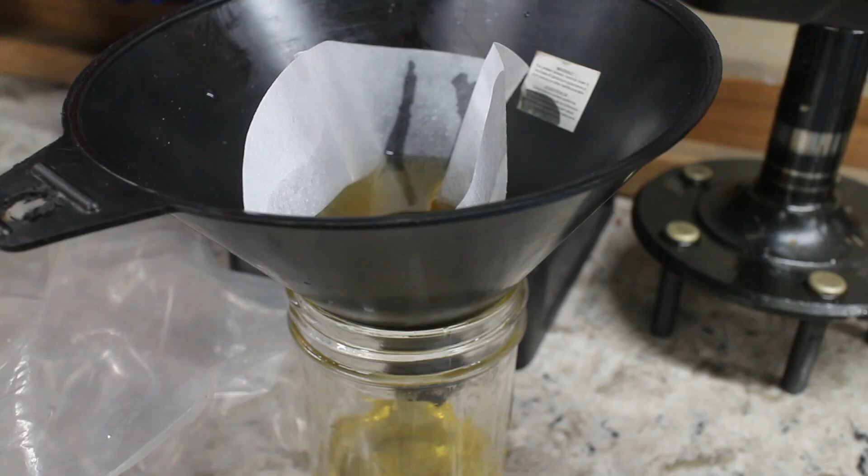I ended up filtering all the new brake fluid over and over again as I kept bleeding it. Use soapy water to clean off any brake fluid. I installed my old tires and wheels and went out for a test drive, and this ABS works great.

Now to racing. See here as I smash on the brakes and take a hard right under trail braking, and there's no fuss at all. The car doesn't care. No oversteer, just turns. Again here, 70 miles an hour to about 50, zero issues. If you notice here, there's new and old pavement on either side of my car. ABS doesn't care. Hard stop, zero issues. It's like cheating.